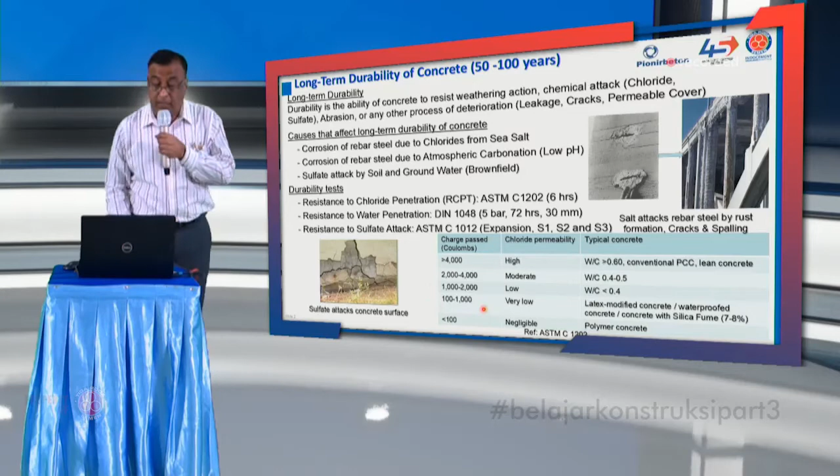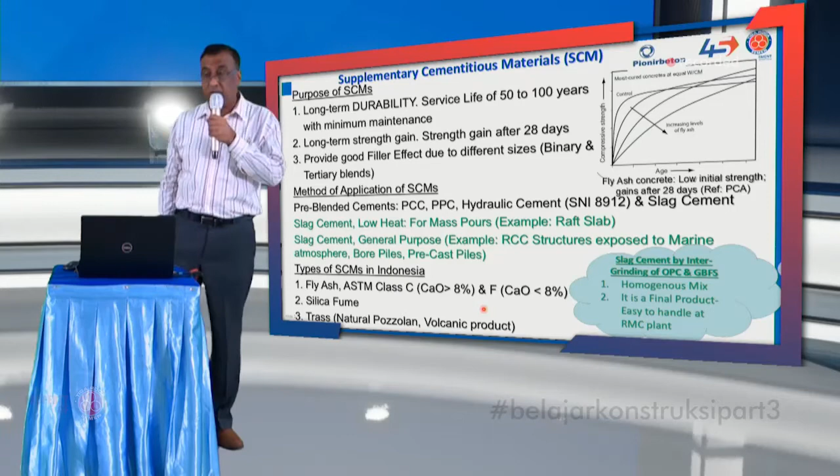Then next slide. So how do you get durability? The question comes, yes, durability is most important. Then how do you achieve durability in the concrete? The first and the most important thing is using supplementary cementitious materials. What are the supplementary cementitious materials?

Like fly ash. In Indonesia, you get two types of fly ash, ASTM-C and ASTM-F also. Some people use silica fume, and you also can use Trass. Trass is a natural pozzolan. It is plentifully available in Indonesia. These are basically the SCMs widely used in Indonesia.

Now, what is the effect of SCMs? SCMs not only provide you durability, they also give long-term strength. You can see in the graph here. If I use more fly ash, the initial strength will drop, but later on you see here, it exceeds your OPC. There's a long-term strength gain. That's the most critical thing for most of the elements. Whereas if you use 100% OPC, it forms a plateau and you do not find long-term strength increase. This is a major advantage of using SCMs.

When you use SCM, there's one more effect called filler effect. The sizes are different. The size of the OPC is different, the size of fly ash is different, the Trass is different. So they give a good packing effect. Because of the packing effect also, you can derive some strength.

Now, what are the methods of application of SCMs? The most important and most commonly used across the world is pre-blended cements. For example, PCC, Portland Composite Cement, is pre-blended in the factory. PPC, which is Portland Pozzolanic Cement. And nowadays, you have what is called a hydraulic cement. It is based on the latest SNI standard. This hydraulic cement is a very good replacement to OPC.

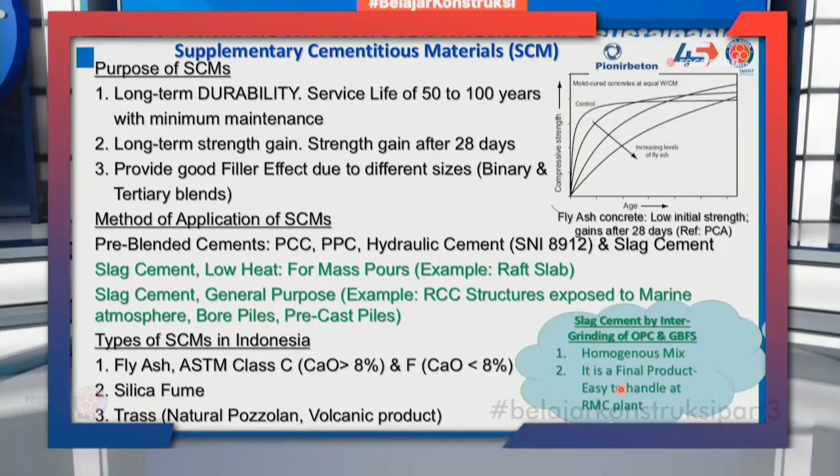So let me go to the next slide. Now, you use SCM in the cement. Blended cement, you have SCMs. Then what exactly they give you, how they perform, and how they reduce your permeability and make the concrete much denser, has to be understood here. If I use my OPC, it reacts with water and it produces C-S-H gel, right? The C-S-H gel is a glue. This glue binds your split and sand together and makes one solid product.

So apart from the glue, C-S-H gel, you also produce calcium hydroxide. This calcium hydroxide does not contribute any strength. It is a defective structure. We do not want this one. This is much more porous. This will affect your permeability. It makes plenty of pore structure in the concrete.

So when you use SCMs, for example fly ash, slag, anything, they react with this calcium hydroxide. This calcium hydroxide is picked up by the SCMs in the presence of water and it produces one more gel.

This gel is also glue. The difference is this gel is much denser than this gel. That's the major advantage here. So this gel starts filling in the pores of this gel. This gel is very dense and starts filling the pores of this gel. So ultimately what happens? Your pore structure, which was earlier like this, gets blocked.

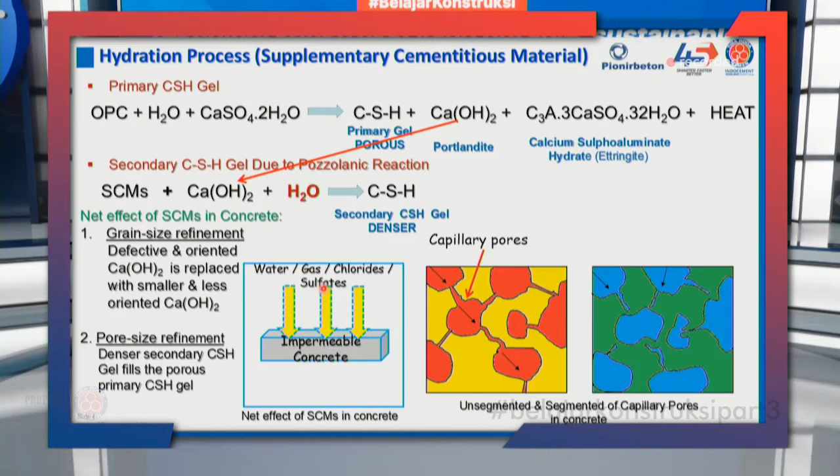So ultimately, if you use SCMs, you end up with a concrete which becomes impermeable to water, gas, chlorides and sulfates. This is the main advantage of using SCMs in blended cements. Next one: yes, I need durability, so I used SCMs. That's not the only one. There's one more basic thing you have to remember. If you want long-term durability, you have to reduce the water to cement ratio of the concrete. It is a fundamental thing.

I'll give you an example here. We cast very big slabs, 1 meter by 1 meter. This research was done when I was working in Sheffield. The thickness of the slab was almost 150 millimeters, and the bars were in the lower part. One part was coated, the other part was not coated. We exposed both parts to chlorides for 5 years. It's a long-term study: 3 days wetting with the salt solution and 3 days drying, for 5 years.

At the end of the 5 years, we cored through these slabs. These slabs had 3 different water cement ratios: 0.45, 0.6, and 0.75. After coring, we made slices: 0 to 5, 5 to 25, 25 to 45, and so on. All the slices at the same depth were mixed and crushed together. Then we found out how much chloride entered at different depths, and this graph is plotted.

You can see 0 to 5 is always weaker. 0 to 5 is the upper surface. It is subjected to bleeding, so you always find more porosity. So don't worry about 0 to 5, but start looking from 5 to 25 onwards. At 45 to 65, for a water cement ratio of 0.45, there are absolutely no chlorides. For the other water cement ratios, 0.75 and 0.60, you still find chlorides at a depth of 85 to 105. That means a lower water cement ratio is the best method to control the penetration of chlorides and sulfates.

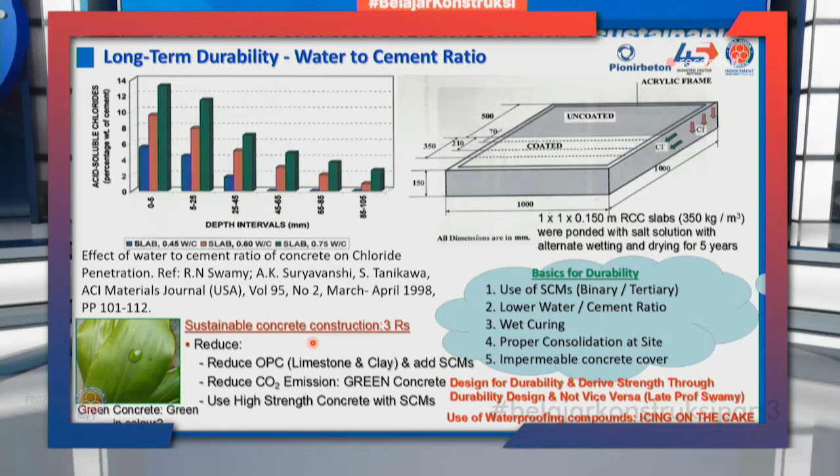What is the advantage? For example, if I replace a column of grade 40 with grade 100, the column size decreases by almost 50%. That means you are using less concrete to build more. So ultimately, when you use less concrete, you're using less stone and less sand, which are natural materials. We have to leave them for the future generation. So by this also, you achieve sustainable construction.

Next slide. This is something on how much carbon dioxide you produce. Remember here, when you produce carbon dioxide, as I said, it will increase atmospheric temperature. Then what is the next effect? Due to the increase in atmospheric temperature, the polar ice starts melting in the North Pole and the South Pole. So what happens? Sea level will rise. When the sea level rises, you lose your country.

Remember, we have a country called Maldives, west of India. This country is going to disappear from Mother Earth very soon because of a rise in the sea level. So now it is a good opportunity for all of us to go and see Maldives before it disappears. And it is no mistake of the Maldivian citizens. It's a mistake of all of us. We contribute to the carbon dioxide and they are going to suffer.

Now I give you a comparison here. If I use OPC, if I use a combination of 15% fly ash and balance OPC, and if I use Portland composite cement, which is PCC. Look at this column: if I replace OPC by a combination of 15% fly ash and 85% OPC, I save about 13.2% of carbon dioxide. That much reduction is there. If I use Portland composite cement instead of OPC, I save almost 29%.

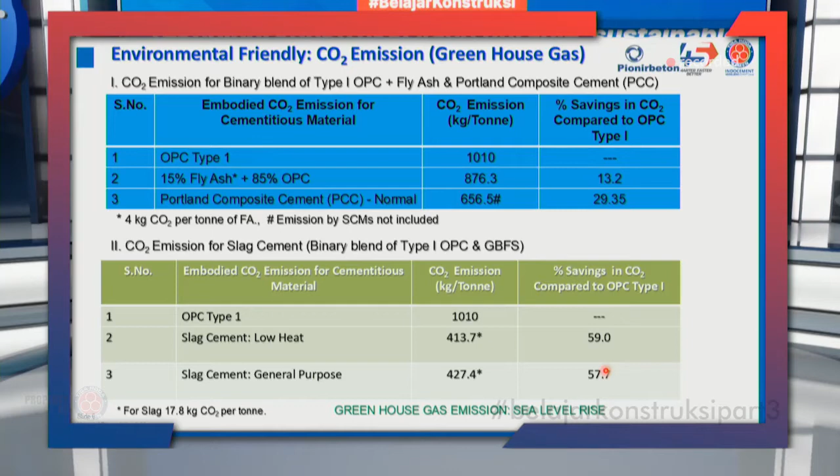Now let us look into what you do before initial setting time. At initial time, you have to cure properly. So first, let's see the definition of curing. The definition of curing is to avoid loss of moisture from the element. You should avoid loss of moisture from the element to the atmosphere.

And to supply additional moisture. When to supply? If the dry is there. And maintain a favorable temperature. These are the three basic functions of curing, okay?

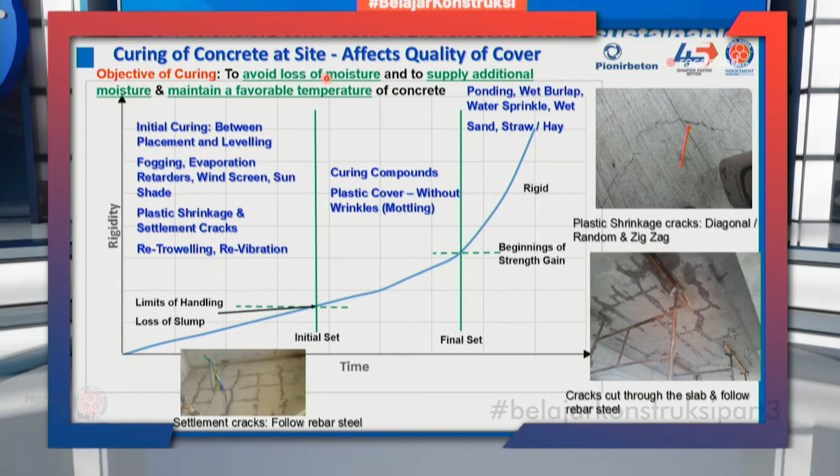The definition of curing is to avoid loss of moisture. Second is supply additional moisture if there is a drying effect. The third one is a favorable temperature. Now if I apply the principle here, you can see droplets of water on the surface. That means the water is evaporating from the concrete because it's hot and it is condensing on the inner surface of the plastic sheet. Are you supplying any moisture there? No. Your moisture is coming out. Are you preventing it? No. And the sun rays can easily pass through because this is transparent. So you have failed in all three aspects. I do not understand what is the use of this.

Second one, this is non-transparent plastic sheet. It still fails in the first two, but it passes in the last one. It is not allowing direct sun rays to go inside. Only one purpose is served. Instead of that, I suggest a cost-effective method: use geotextile and wet it. The same geotextile can be reused, whereas this plastic film cannot be reused. Once you apply, it's use and throw. So better you go for geotextile and wet the geotextile. And you can loosen the tie bolts and put the water, then you can dismantle your formwork.

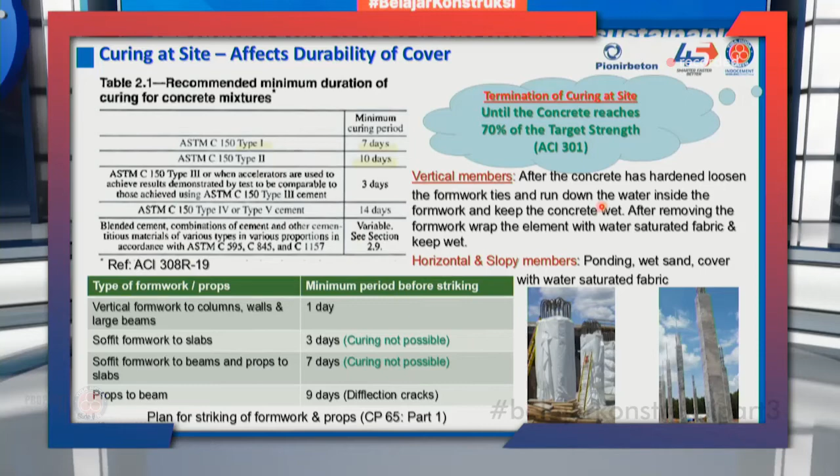This is consolidation, and you have to generate a dense concrete at the surface. When you use your vibrator, remember here, the vibrator should not touch the formwork, and should not touch the rebar also. If you touch the rebar and formwork, no effect of vibration. Second thing, look here, the vibrator is held not vertically, it is held in a slopy way. It has to be perfectly vertical. If you hold the vibrator horizontal, you are making the concrete bleed more. It's not going to vibrate.

And the third thing is, your length of the vibrator is very critical. If you are compacting a layer of 200, your length of the vibrator has to be 200. Many times I see depth is 200, length of the vibrator is only 100. Then you're going to have these kinds of pour lines. There's no joint between the bottom layer and the top layer. The pour line is a defect. Water can enter. And if it happens to be a retaining wall, water will start gushing through here. So ensure that your length of vibrator at least matches the depth of your concrete layer. The next thing, people use the vibrator to move the concrete. The vibrator is not meant to move the concrete.

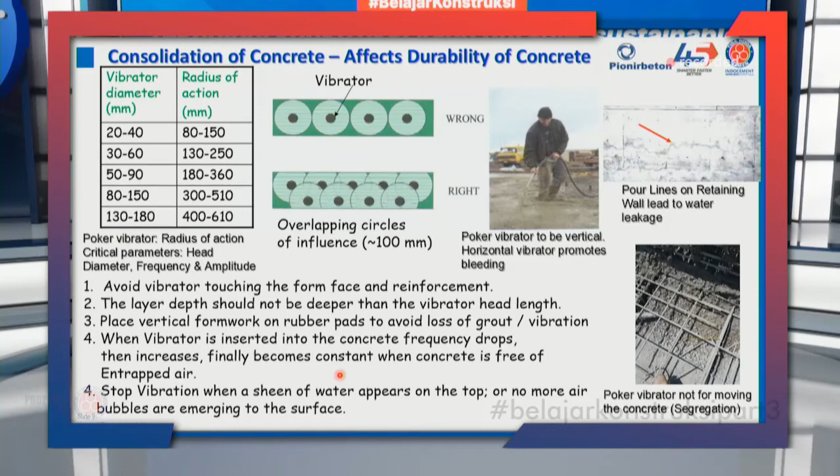Next one. When do you finish it? There are many issues because of poor finishing. With poor finishing, you end up with a lot of surface defects on the elements, especially for slabs. Now, this is once again my setting time curve. This is the initial set. This is the final set. From here to here is the period for transporting the concrete, placing, screeding, bull floating, and finishing.

Then what happens? During this stage, you will have bleed water. When the bleed water comes, you find a very shiny surface. So when the bleed water comes, should you finish or not? Don't finish. Wait until all the bleed water disappears. If you simply finish on the surface, the top layer becomes very weak. The water cement ratio of the top layer will be very high, and it is going to cause dusting and crazing. This should not happen.

The other thing is, you have to wait until all the bleed water comes out. If some bleed water is trapped below the top surface, then we end up with what is called delamination. Because the bleed water is below the top layer, it has to come out. Where does it go? It will push up the top layer. So we get delamination.

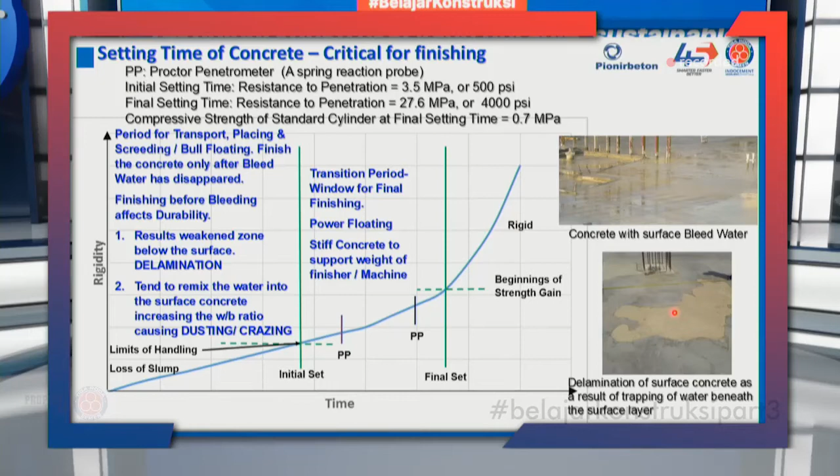You have to hold the formwork for a longer time. Then there is no worry. Even with a 24-hour setting time, at 28 days you're going to achieve your target strength. There's no issue there. Now, this picture shows early removal of formwork. I tell you, if you have a longer setting time, please don't remove it. You can always complain to the suppliers, no issue. You have the right to do that.

But I suggest you keep one cylinder cast using the same concrete. Keep this cylinder next to the element, same grade, and do the same type of curing. Observe the setting time of the concrete. You check with your finger. Once it has set, then you can remove the formwork. If you remove it without caring whether the concrete has set, what happens? The concrete will fall.

Then what do you do next? You do repair. Remember, the quality of repair depends upon what type of repair material you use and your workmanship. And most of the structures which have failed, failed near the repaired portion of the structure. So a repair is always a repair. Don't try to do it.

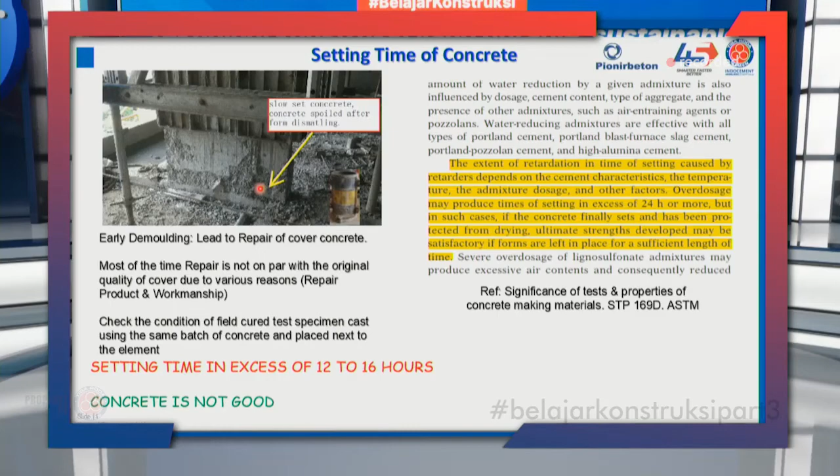This is the last thing. When bleeding is there, please don't walk on the surface. You see, people have walked on the surface, and it causes a very big repair. You should not do it. This is an example of water trapped below the upper surface. You try to finish earlier, the water is trapped here, and then this opens up.

These are called blisters. See, the blisters are shown here. If the blisters are there, use a trowel and break them, then finish it. Don't try to leave them as they are. They will lift up the upper layer.

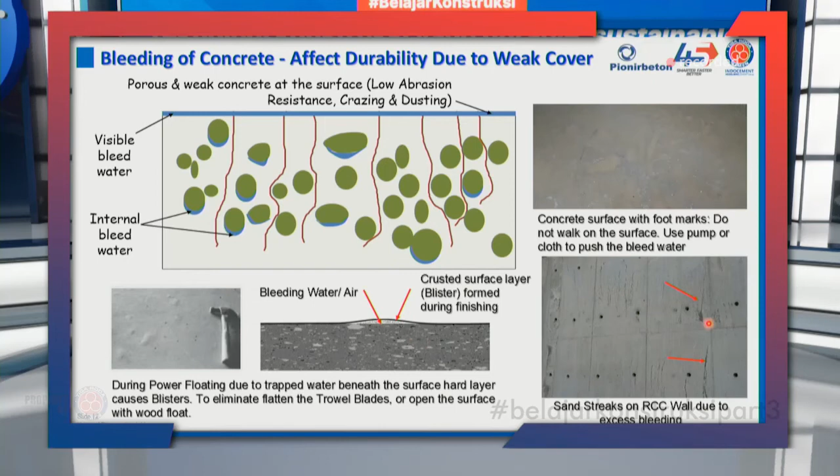This is the last thing I tell you. This is the way of curing. We have to improve our curing at the site and making the specimens. You can see here, these specimens are made right on the road. That means when the lorry moves here, the cylinders will be dancing there. The cylinder should not be disturbed when the concrete is fresh. This is a very bad way of management.

Something has been knocked out. And look at here, all the cylinders are dry. Look at here, half the cylinder is exposed. And here, some people are sleeping over the cubes. They put a plywood sheet and rest on that. When they move, the cubes also move and disturb the concrete. Ultimately, if this happens, the cylinder will fail and you end up coring. When you core it, you are basically destroying the original quality of the concrete.

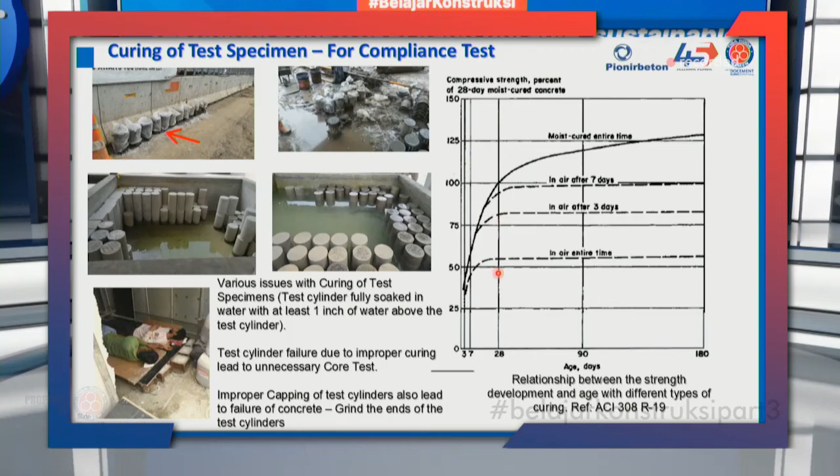And this you have to remember: what happens if I don't cure for 28 days? If I cure all 28 days, this is my strength. For 7 days, it's only 90%. If it's 3 days in water and afterwards in air, it is only 75%. Entirely in air, it is only 55% of the target. That should not happen.

Last one is honeycombing. Honeycombing is a defect in the cover. Why does it happen? Because it is not properly vibrated, your slump has dropped, or your choice of aggregate size: the aggregates are bigger than your spacing. There is an ACI requirement. For example, if 25 mm maximum size aggregate is there, the clear opening has to be at least 33 millimeters.

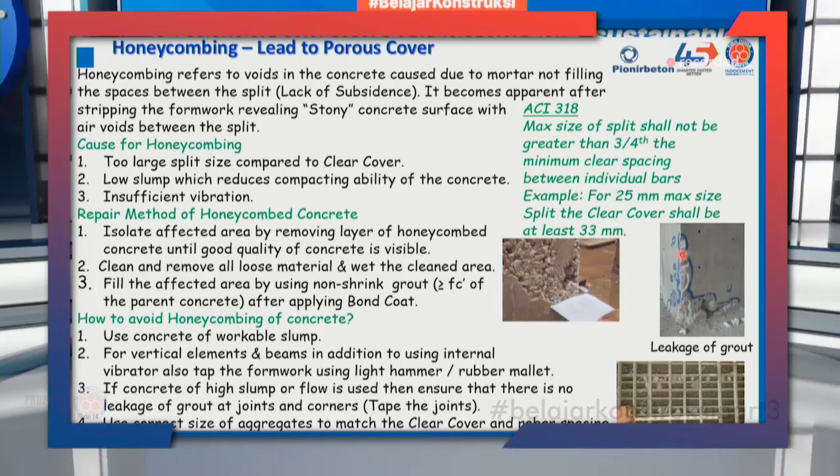And this is the example of leakage through the corners. Corners have to be properly taped before you pour your concrete. And leakage will be more if the concrete is flowing concrete. This is my last slide. This is for mass concreting. Mass concreting, what is the effect? Cold joint. You should never get a cold joint. The cold joint becomes a path for leakage. Of course, it will affect your structural integrity.

So now, you are casting a slab here. Divide the slab into segments: segment 1, segment 2, segment 3. Then you have 3 pipelines, 3 pumps basically, each carrying a pipeline, pump 1, pump 2, pump 3. You always use shorter lengths of pipe. This is the discharging end. You have a flexible hose. You start from here, discharging and placing the concrete, then you come back here. Meantime, you also start here, so that both are done at the same time. There is no cold joint in the bottom layer.

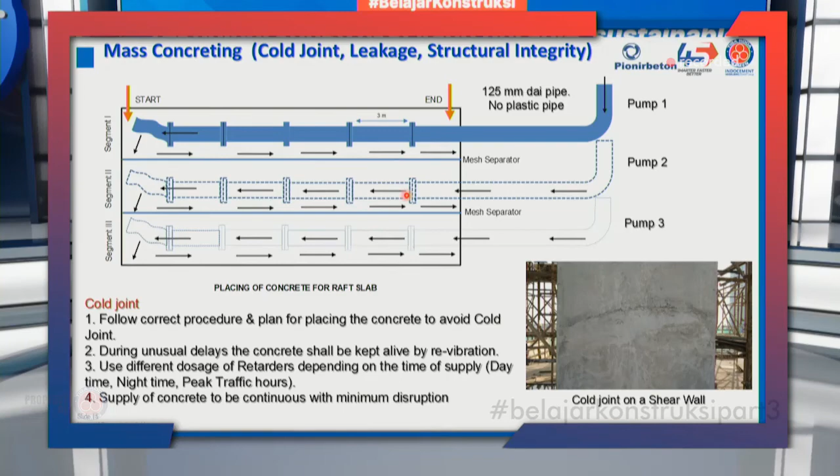Once you finish the layer here, you should not start from here. You have to go back and start from here, because this is the first concrete placed and it is going to set faster. Don't start from this end. Once again, assemble all the pipelines and come from here, then continue the process. There's no chance of cold joint. The simple way of avoiding cold joint is, if you suspect some delay, keep on re-vibrating the concrete. That's the best method to control the formation of cold joints.

Let me come to the conclusion. There are 2 conclusions here. Long-term durability can be achieved by the following measures. One is adopting a lower water to binder ratio. Using blended cement, which can be PCC, PPC, slag cement, or hydraulic cement. I said hydraulic cement is the best replacement for OPC. Hydraulic cement can also give early strength, it can be designed for moderate and high sulfate resistance, and it can also be used for low heat.

Proper curing until the concrete reaches 70% of the target strength. Following the correct procedure while compacting the concrete. Following proper construction practice to avoid defects in the cover concrete. These are the basic things to follow to get durable concrete. Then sustainability: if you use PCC, PPC, slag cement, or hydraulic cement, they're all green cements and also give you sustainability. So, in the end, construction is not only for building, but for durability, environment, and sustainability.